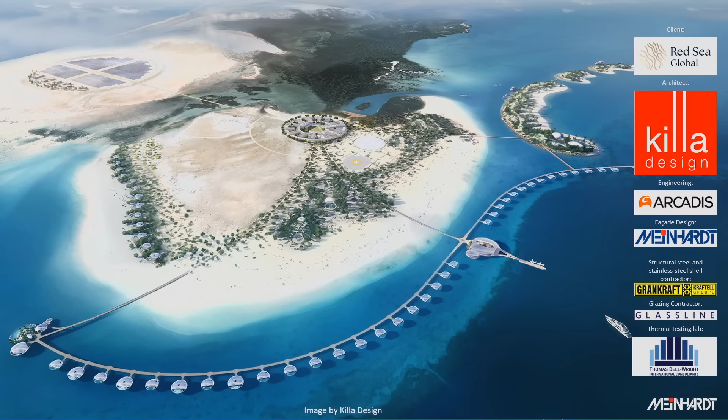So as Arvin said, I am the technical director for Meinhardt Facade Technology in Dubai. And today I'm going to present one project that I've personally been working on for the last 3 years, which is the Shebara Hotel in Saudi Arabia. Shebara Island is an island off the west coast of Saudi Arabia. It's about a 45 minute boat ride from the mainland, and it's a completely off-grid island.

This development incorporates a solar farm that powers the whole electricity for the development. It also has a solar-powered desalination plant that supplies the fresh water. And they also have a small recycling plant to minimize the amount of waste that goes into the mainland. The resort is a hyper-luxurious hotel, 73 keys, and it's spread horizontally across the island in the form of several individual assets.

So there's a bunch of amenity assets, such as the arrival lobby, specialty restaurants, spa, fitness center, kids club, and so on. And the accommodation assets, which take form as overwater villas and beach villas. Today, in this presentation, I'm going to be focusing on the design and the fabrication and construction of a typical overwater one-bedroom villa.

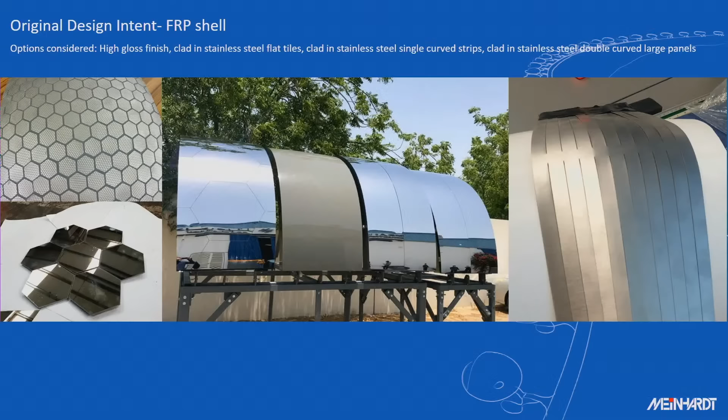So in the initial design stages, the structural approach for the shell of this villa was to have an FRP structure, carbon reinforced polymer structure. So in the very early design stages, we were looking at options of how to finish this carbon fiber structure.

So we looked at different coatings. We looked at automotive painting. We looked at gel coatings. We looked at different ways to clad this FRP. So we've looked at having very small stainless steel tiles, flat tiles. We looked at having long single curved strips. We've looked at having larger tiles, double curved in shape.

And there were mock-ups prepared for all these different options that we were looking at. When the mock-ups were presented, the architect basically rejected them all because they all failed to meet the design intent. What they wanted was a completely seamless structure. They wanted a polished, mirror-finished, seamless structure. So the paint wasn't reflective enough, and the other options had too many joints, basically.

So then we started really looking into having one singular shell made out of stainless steel that was completely seamless. Obviously, we had never done anything like this before, so we started looking for precedent constructions that had this similar approach. So everything that we found at the time was either sculpture-like structures or constructions that were non-habitable.

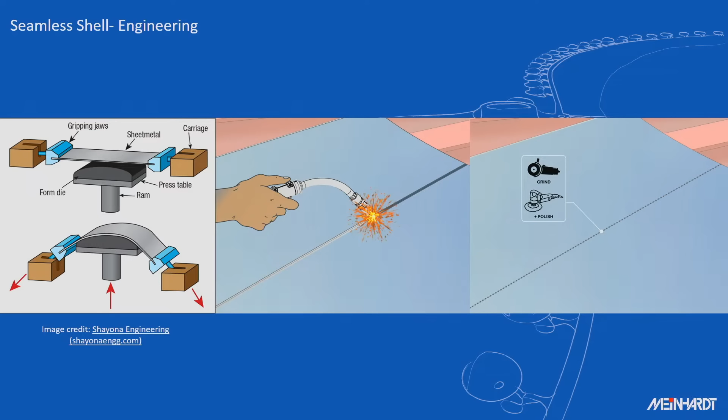So we started our design by trying to come up with the most efficient thickness for this shell. So when we started doing the study, we realized that the thickness of the shell was not going to be a result of the structural requirements alone. We had to also take into consideration the thickness to withstand the fabrication process, because the sheets needed to be double curved, needed to be welded, needed to be ground, needed to be polished. So we needed to make sure that we had enough thickness there to withstand this fabrication process, but make sure that it was thin enough so it was light for the construction.

Another thing that played a big role in determining the thickness of the shell was the visual appearance. So obviously, the visual aspect of this shell had a tremendous importance in achieving the whole design concept by the architect. So what was driving the deflection criteria for the shell was really the visual aspect.

In order to make sure that we had a shell that was thick enough that wouldn't deflect and cause any visual distortions with the images reflected, we ran a number of different analyses, testing different supporting arrangements, layout, and different thickness. And then we would export the deflected shape into a rendering software and render the deflected shape with different backgrounds to understand what the deflection would do in a real scenario.

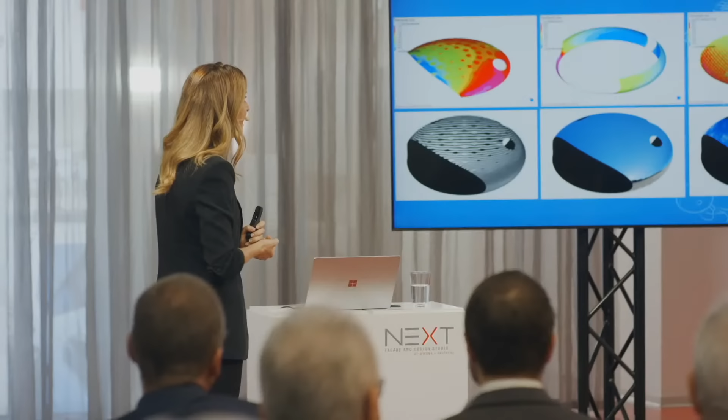And we've gone through a lot of rounds with the architect, and finally he said that this was acceptable in terms of visual distortions. One thing that we were very lucky with as well is that, as you can see, the majority of the deformations happen at the top and at the bottom of the shell, where the geometry is a little bit flatter. And at those areas, the top and the belly, the shell will be reflecting either the sky or the water below. So any deformation is not really visible.

At the perimeter of the shell, where it reflects the adjacent buildings and the surroundings, the structure is very stiff because of the curvature. So the deflections that would cause the deformation are almost unnoticeable on the sides. So that was lucky that we had this shape.

Another thing that we've considered in the design, and that was part of the engineering as well, is that we had to make sure that the connections were flexible enough to allow movement. So again, coming to applying the thermal load, we had to make sure that the connection points will not restrain the shell from moving, which could end up causing deformation when you looked at the shell from the outside.

So all the connection points are fitted with Teflon pads, which allow sliding of the connection and a minor compression, which enables the shell to expand and contract almost independently from the supporting structure. Also, that releases a lot of the stresses.

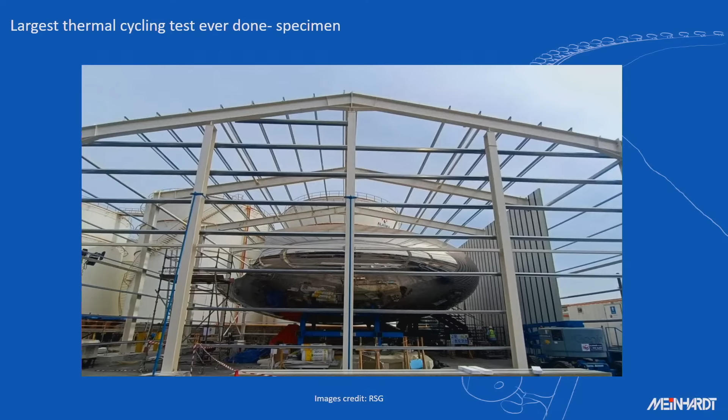So this is the sample. It was at the manufacturing facility. So the lab actually had to go to the manufacturing facility and build their chamber there. This is the steel structure for the chamber. The chamber was then clad with thermal panels.

There was huge air conditioning equipment connected to the inside of the villa, because the inside of the villa we kept at a temperature of 24 degrees during the whole test. And then there was also air conditioning equipment connected to the inside of the chamber to create the cooling cycles. You can see there are some cables there. Those are thermal sensors that were attached to the shell.

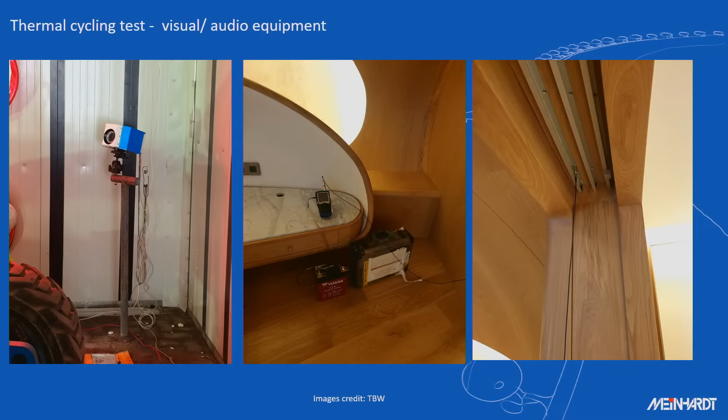There were 500 light bulbs to create the heating cycle. So the cycles were from 5 degrees to 85 degrees. And this is some of the equipment. So the shell was completely fitted out. This was also the mock-up, so it had all the fit-out, glazing, everything. So the inside of the shell was kept at 24 degrees. The external went through the thermocycling.

So we had cameras everywhere that caught images of the whole shell during the entire test, and the audio equipment. And there were also vibration sensors placed at different areas to enable the team to localize the source of sound, if any. Also, the inside of the chamber was painted with vertical lines, so it would be easy to detect any visual distortion on the shell. So the test took over 4 days. And thankfully, there were no recorded noises, and the visual distortions that were recorded were very minimal and acceptable.

Okay, moving on, let's talk a little bit more about the design. So the cleaning and the access for the shell is done by rope access. That opening there is the entrance, and there's a little service room just before you get into the villa that gives access to an access hatch.

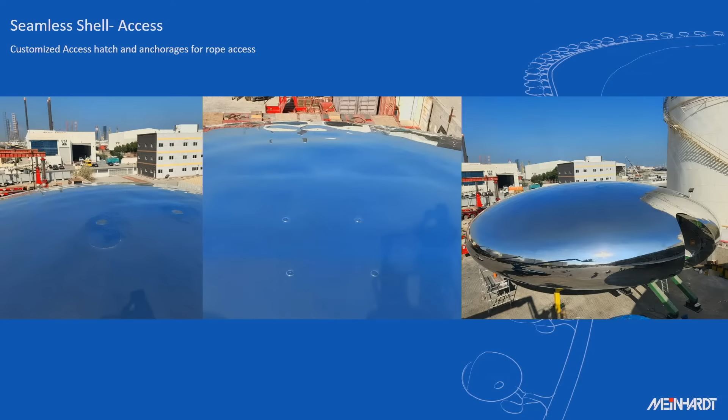There was a lot of concern from the architect during the whole design process that we could not damage this seamless appearance. So everything always had to be very thoughtful in terms of keeping this design intent. So the access hatch was customized to take the double curved shape of the shell. All the anchor points for the rope access also incorporated a little cover plate to make sure that they were not visible from outside.

There's a skylight. The one-bedroom villa has one skylight, and the two-bedroom and three-bedroom have two skylights. There was a lot of study done from our side to make sure we placed the skylight at a location where we could use a single curved glass on the double curved surface. And the glass was actually manufactured flat and then curved in position. So this whole exercise made a lot of difference on the cost, because originally it was a double curved glass.

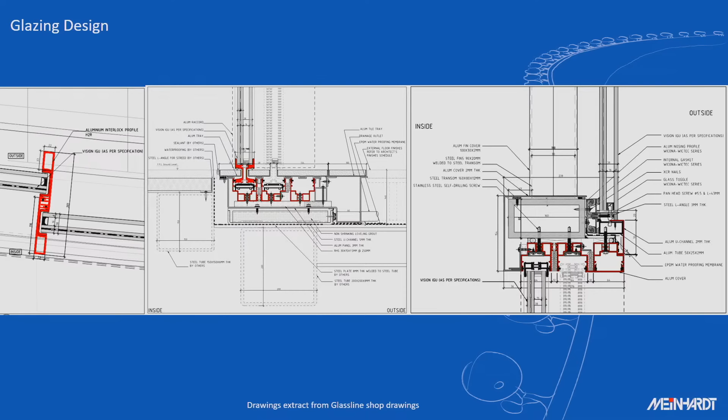The facade system: the terrace has big glazing at the front with a slimline door system, Vitrocsa, and the fixed panels on the sides and on the top are the Wicona system, coincidentally. The reason why I'm talking about this sliding door is that whoever is familiar with the system knows that the flatness of the track is really important for the function of the system. This system relies on bearings on the track. So any deviation or deflection of the track could potentially impact the operation of your door.

Now, the approach for the construction of these shells, or these villas, was completely off-site manufacturing. So all those villas were manufactured in Dubai, and then they were put on a barge and shipped to the site. Which means that when we were doing the design for those elements, we had to take into account a bunch of different deflected shapes for the base structure.

So when the villas were under fabrication, they were supported by a temporary frame, supported at 4 points. When the villa was ready, it was loaded onto a barge, also supported on this temporary frame at 4 points. Once the villa got to site, it was unloaded and placed onto the pile caps, and then the support condition changed from these 4 points to the next structure.

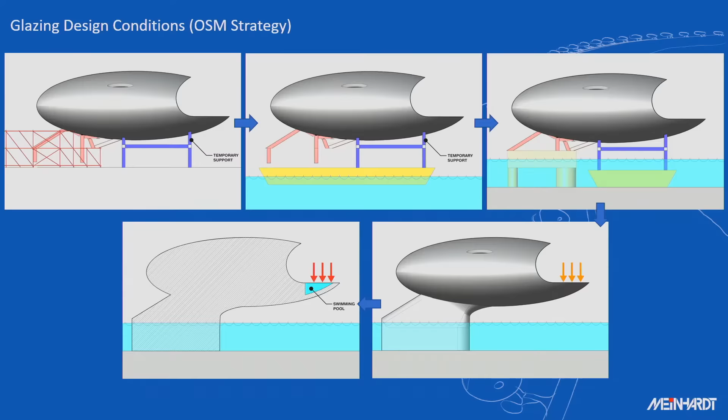So when there was this shift in support condition, obviously the whole thing deflects a little bit here. And then in future, during operation, there's a swimming pool on the terrace that is loaded with water. And again, once this is loaded with water, there's another. So all those movements had to be taken into account, and we had to run the design on all these different deflected conditions to make sure that we had enough allowance in the system to accommodate

all these different movements. In fact, Vitrocsa had to design a project-specific head track for this project to make sure that at the top of the door there was enough movement allowance, because during the loading and unloading, there was quite a bit of deflection at the head beam.

So just talking a little bit now about the construction process. So once this project was awarded to a company called Grand Craft Industries in Dubai, they've done the structural steel and the shell. During the tender period, a bunch of contractors that bid for the project prepared samples to present. So these are some of the samples that were presented during the bidding process.

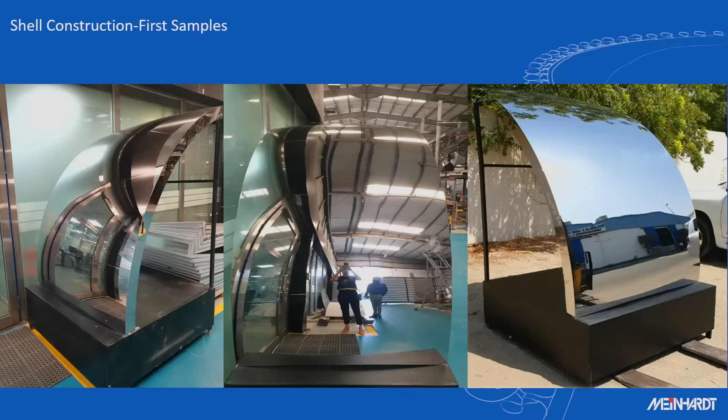So this sample includes 2 welded lines. And everybody got really excited and said, that's great, it looks great. But the question on everyone's minds is like, okay, this is a small sample. Can we replicate that on a full-size villa? So the samples started getting bigger and bigger.

So, at the openings, the stainless steel on the shell wraps around the opening. So we always knew this was a very critical detail because it wraps around and twists, and you had obviously the welded joint along this whole face here. So we started requesting bigger and bigger samples, and then at a certain stage, it was like, okay, I think they got it now. I think we're happy, and everyone is actually quite impressed with the quality that could be achieved.

So on the fabrication of the shell, this is the ellipsoid shape. This shell was divided into 4 typical panels, which essentially means that there were 4 molds that were created to create the double curved panels. Grand Craft would manufacture all the molds out of MDF with a 6-axis CNC machine.

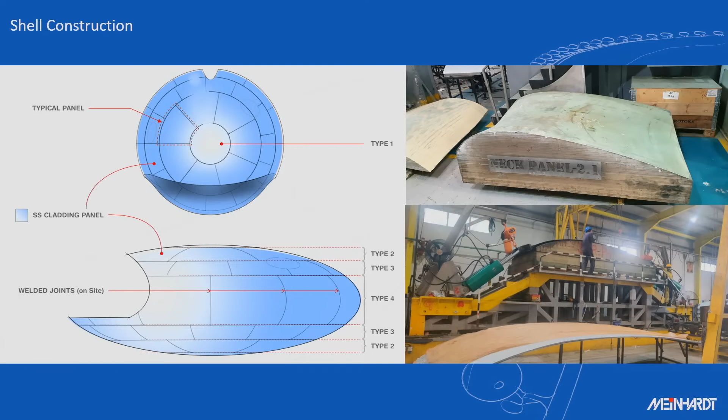And the method used for the double forming is called stretch forming, which basically means you have the panel over the mold and you stretch the panel over the mold until it takes the shape. Obviously, this process takes a few rounds because there's a bit of rebound after you let the panels go. So they had to adjust the molds until they got the right rebound to achieve the shape.

Once the panel was formed into the 3-dimensional shape, they would use a laser cutting machine that has the ability to cut 3-dimensional panels, to cut the panels to size. Then they developed a bunch of panel-specific polishing machines that would do the first polishing to achieve the first set of mirror polish finish for the sheet as a whole.

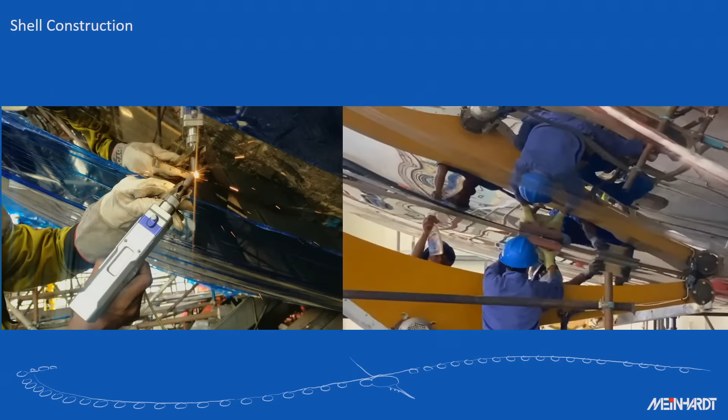Once the sheets were fabricated, they would be shipped to the assembly facility in Al Hamriyah in Sharjah, near Dubai. And then the panels would be assembled into the frame, and they would start welding the panels together. So, that's just some images of the welding, but the real work came with the polishing. After the welding was done, they manually ground all the panels and polished and polished and polished.

And this is an image of the first benchmark villa that was produced. So there were obviously a few rounds of benchmarks that they would present, and we would all come and see, no, it's not good enough, it's not good enough. Eventually what they did is they removed the villa from the fabrication facility to let it be under open sky. They built a pond under it, and then everyone was really happy.

Because the problem is, obviously, it's really good quality, but you can still see a little bit of the welding mark. And obviously, when it's reflecting the roofing full of straight lines, the same thing happens that happened with the zebra board. All the deformations become really apparent. So the minute they moved the sample outside and they put the water, all the deformations were gone. So everyone was very happy with the results.

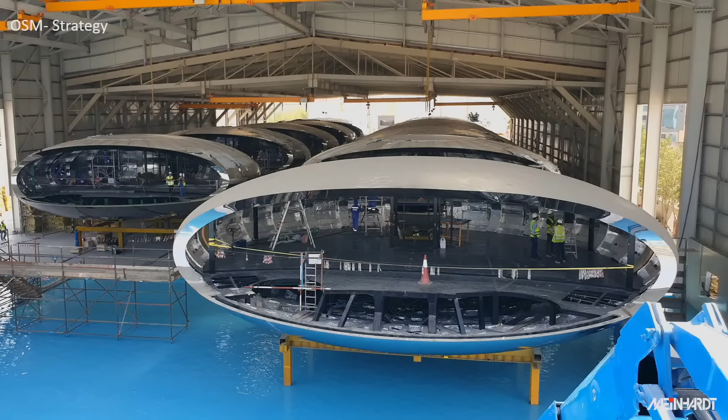And this is just a picture of the fabrication line, so you guys have an idea. There were 3 of those ongoing simultaneously.

Okay, so then like I said before, the approach for this construction was to have as much as possible fabricated off-site. So everything was done in Sharjah and put on a ship container. So we had structural steel, the stainless steel shell, glazing works, MEP ducts, swimming pool, and a little bit of the internal works prefixed onto this villa before it was shipped to site. The total weight of the construction was about 115 tons.

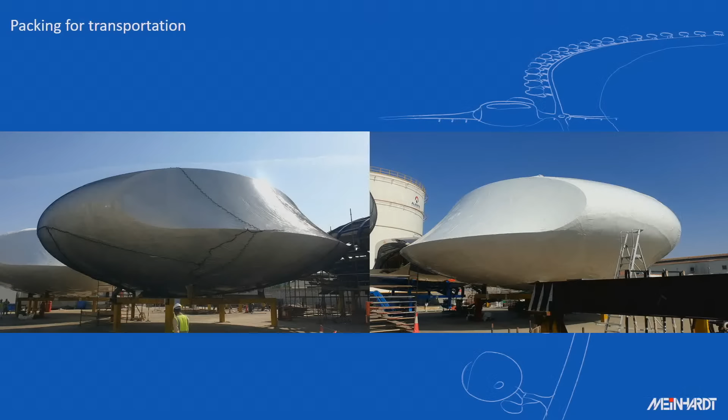Once it was finished, they would wrap it around, seal it, and then put it on the back of a barge. Now, this is the construction facility where it's located, in Sharjah. They built 3 warehouses here side by side, and it's conveniently by this canal that has access to the ocean, so the loading onto the barge is very easy. I got this photo from Google Earth during the construction, and you can see here the shells shining at the end of the production line.

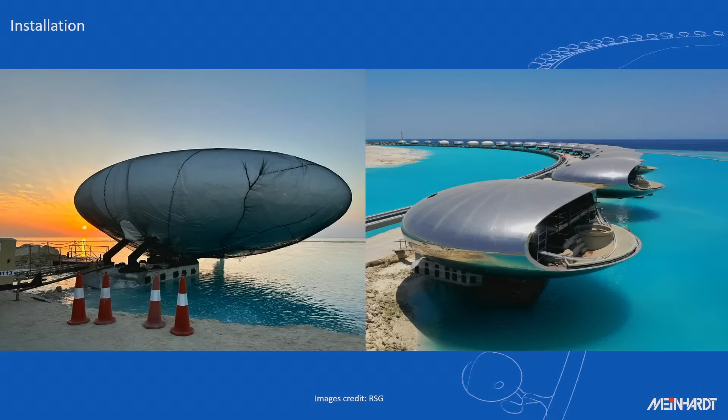So once the villas were ready, they would load 4 at a time onto a barge. The trip to KSA took about 22 days. Once they got near the site, they would load the villa onto a smaller barge that could navigate the shallow waters. Here you still have this temporary support. And then finally it was unloaded onto the pile caps on site. That's a photo of the first villa installed, and this is a more recent photo of an almost complete set of overwater villas.

This is just some more recent photos from the site, as it looks. That's probably a month old now. So it's almost finished. I think the plan is to open the hotel next year.

So just before I finish, summarizing my personal experience working on this hotel. It's not easy to work on a project like this because it's something that has never been done before. It's very innovative. Everyone is criticizing, literally everyone. Everyone that would come and see the project would find 100 things that could go wrong. So one of the things that was really good is that the design team were very close. We were very close with the architects, with the engineering team, very close with the client, which is really, really important, and also with the contractor.

Because when you work on something like this, there will be many challenges along the way, and you need to have a good connection with the design team to support each other. And if someone comes with an idea that is outside the box, that's probably the one idea that will work. So just be open to ideas and try not to criticize, because the amount of critics from outside was huge. Once the project went out for tender and we shared the documents, everyone said this is never going to work. So it's important to have a really good relationship, so you can get support from each other in these hard times, and support each other's ideas to make it happen. So that's it. Thank you.

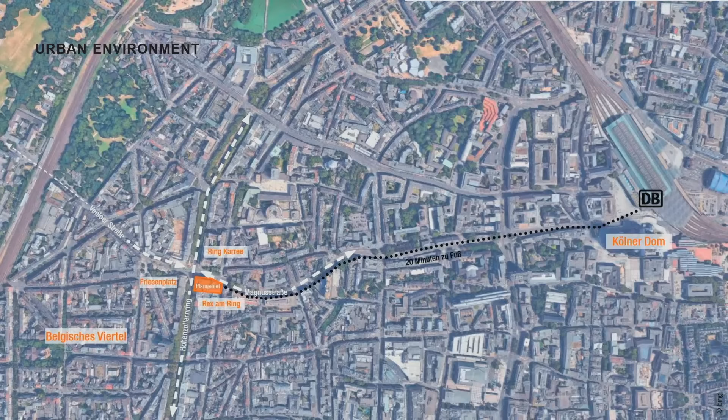As you see, renovating existing buildings has one of the biggest impacts on decarbonization. So I would like to show you our Central Cross project. I'm going a little bit deeper into this refurbishment project, and have also focused our flashlights briefly on 5 more projects from different stages. This is our Cologne project, located on a very high-frequented crossroad with a direct connection to the main station and to the Cologne Cathedral. And of course, everything, especially around the cathedral, is related to this World Heritage and should be considered carefully.

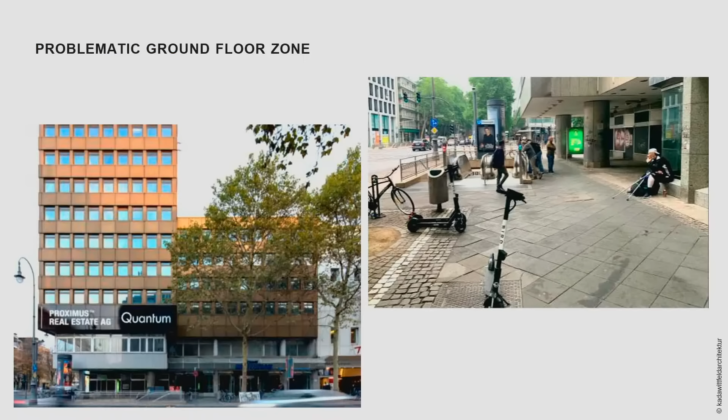We could convince our client not to demolish the building. He could build a higher high-rise building on that site, but we said, okay, we want to work with the substance and structure which is there. With the client Proximus and Quantum Real Estate developer, you see the usual problematic situation of these very unattractive ground floor areas. We have the metro station around, and so we decided to give the building a new appearance in pinstripes, to make it more elegant, to create more generous space at the ground floor, to create new addresses for the building, to activate the roof surfaces, and also to optimize the functional offers.

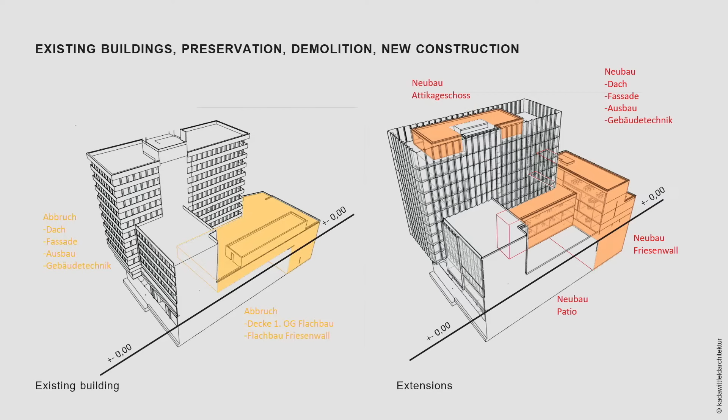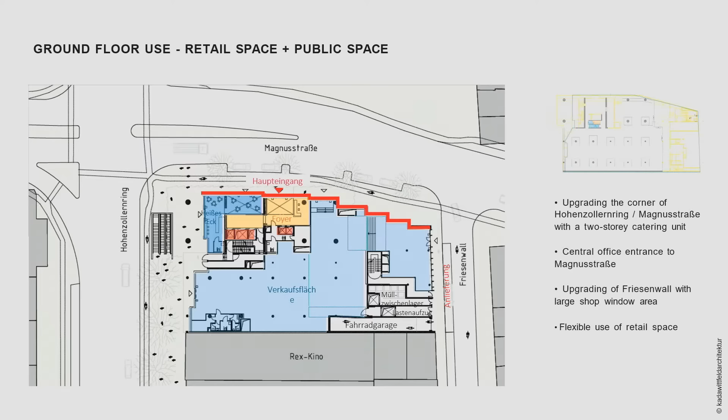And the new address, we were trying to emphasize the corner situation, giving it more generosity and space, and a two-story foyer. And with this staggering also along the road, we are creating more urban space with a more open and transparent appearance.

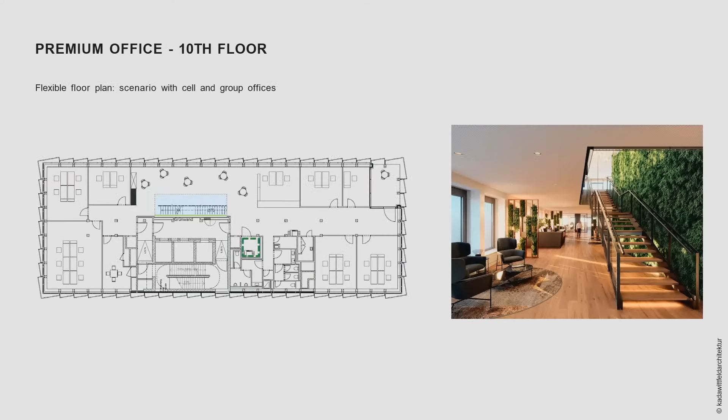So the existing building, we have very low story height. We try to compensate for that in the extension building. And here you have an idea of these staircases connecting the two. And we try to give each story an outside. Here is a small loggia, trying to create new internal connections, direct connections. And of course, the potential of the rooftop with the fantastic overview over Cologne, and especially on the Cathedral of Cologne.

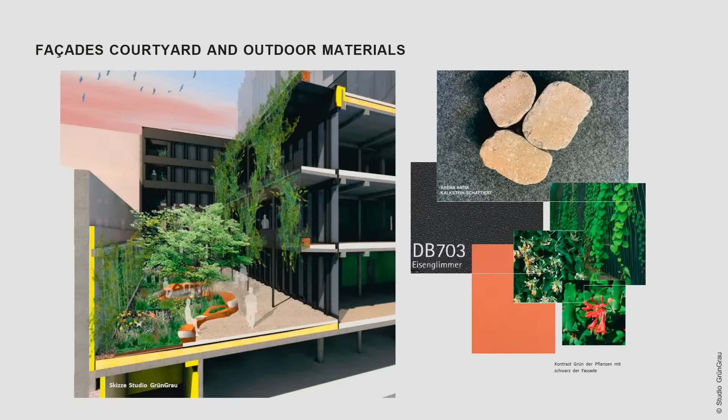This is a graphic that shows that each story should have an outside quality in terms of different offers, like all the terraces; all the offsets are creating new terraces where people can connect and come together and work. The courtyard, which is very green also. And the ecological added values are diverse. Of course, we are trying to bring out as much as possible. We have a certification aim.

And what always plays an important role to us is to really look at the local passive potential of the sites. So we will use the wastewater heat, and we will also try to optionally use the heat and the cold of the metro station. And photovoltaic, everything, rainwater retention, what a modern building should offer.

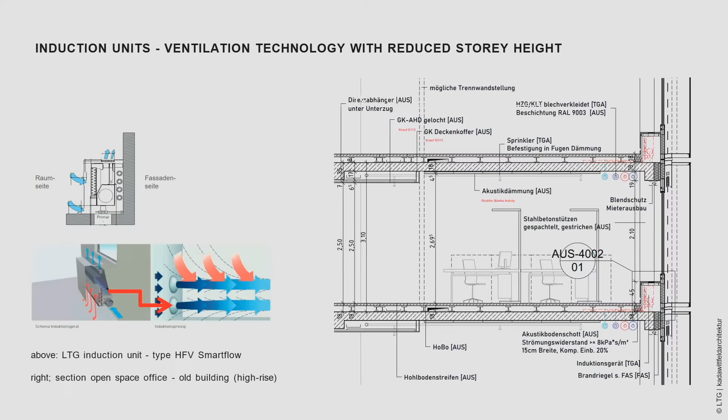So the technical concept is, by creating less altitude for the infrastructure, we're working with induction units, devices for cold and heat supplies, and also for the ventilation, decentral ventilation, so we can put the infrastructure in the cavity floor and also in the place above the moving area, so the working area will be free, just adding this acoustic absorber layer above, and the other infrastructure is running alongside the facade. One more detail for that.

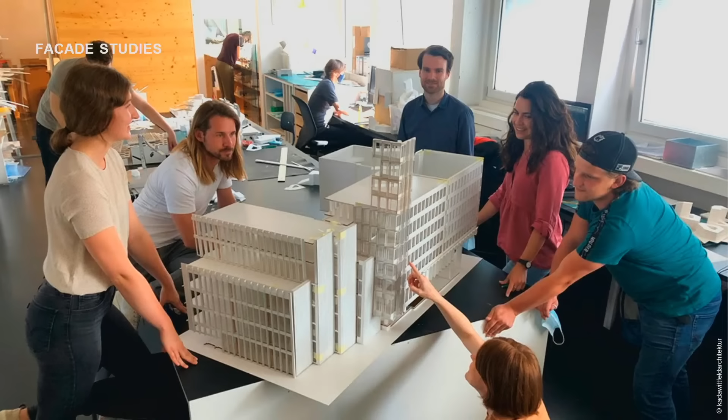And the basement story used to be a parking lot, and now we are able to implement 150 bicycles, offering all the devices and services that a modern bicycle garage should have. And we still love to work with physical models. For a lot of every project we are building these physical models and are considering it together with the team.

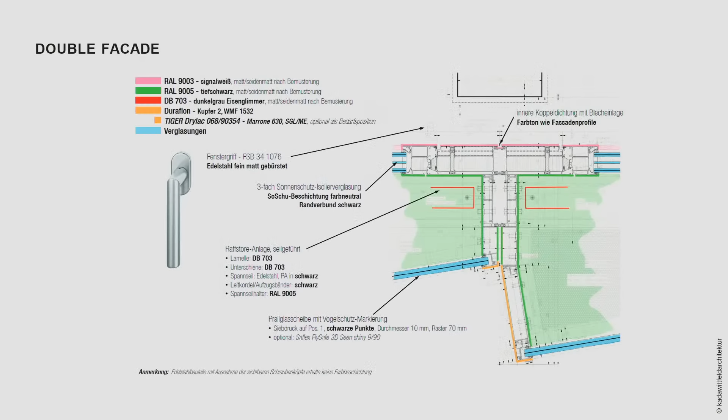And here are some impressions for the facade. It's the double facade. The windows can be opened and then offer this comfort ventilation individually. And we are supported by Drees and Sommer, the facade experts in Cologne. And of course, I want to show you also these beautiful details.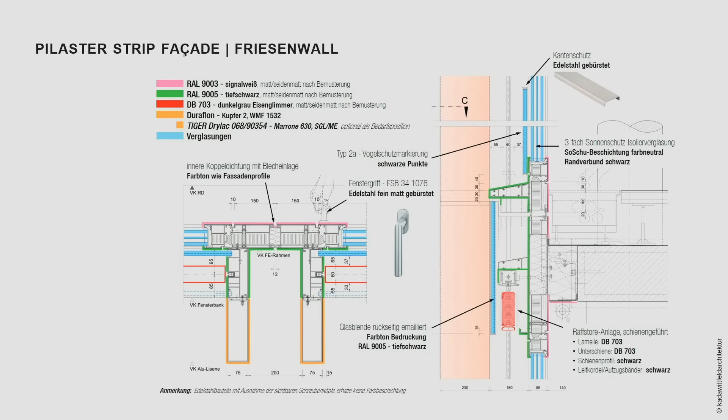So here you can see that this staggering is a design idea for us to deal with on different levels. So we have these volumes of the extensions staggering along the street, but also in the ground floor area, but also in a smaller scale at the opaque facade, at the extension, and also at the double facade. So the simpler facade in the extension, with this double pilaster, is trying to emphasize the verticality of the project. One more detail.

And now I will come to our focus, our short flashlights. The first project is a very old one. The competition was in 1999. It's the central station of Salzburg, and we won the competition in 1999, and it took us 10 years for planning. So it was quite complex to convince also the monument preservation offices of our design, and it took then 5 years for the realization.

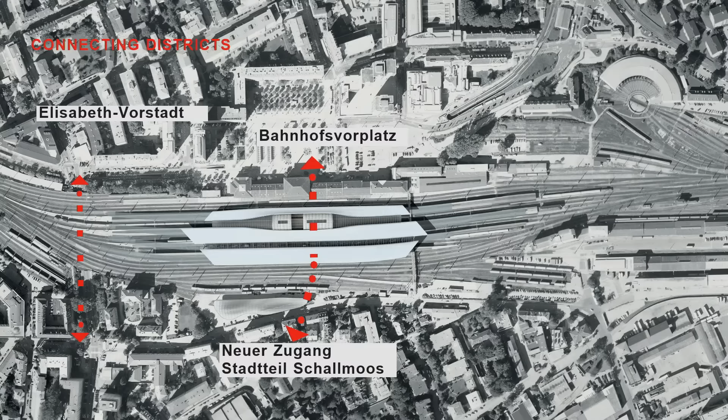So you see 3 eras, 3 roofs, and one main challenge was that we should switch from a terminus station to a through station while the operation of the station was going on. That was quite challenging. And the second main task was to connect these 2 different districts together. So we have this passage level on the ground floor level coming from the main station side, and we have these new linear dynamic tracks above.

And here, a first impression of this historical entrance hall and the platform, the old historic platform hall from 1909, which we implemented, and it was important to us to have one big design for this new roof on the top of the main station. So it was a kind of substantial refurbishment for the historic part.

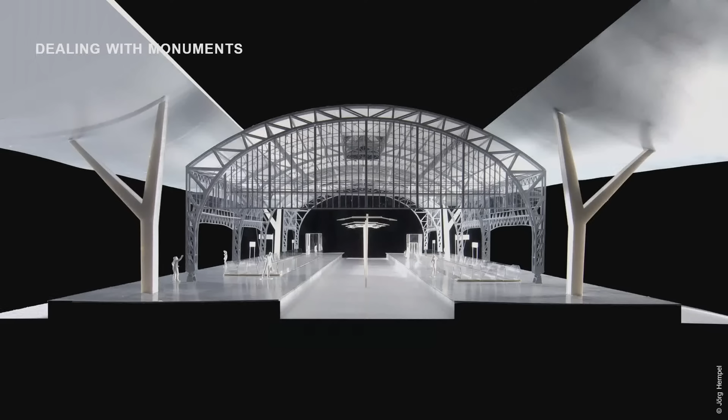And here a model of the platform hall, the old one, and we built a lot of models and tried to look how we can combine them together so that the new roofing is not stealing the show from the old structure. And this is what it is today, and it looks quite natural right now, but it was really a huge effort to restore it.

And it took us a lot of convincing the monument preservation offices that we can change the color of the construction. But it was very important to us to have as much natural light as possible and a bright railway station, so that people feel welcomed. And we were really pleased that the Austrians chose this railway station after realization as one of the most beautiful stations in Austria. So that was nice feedback and motivation for us.

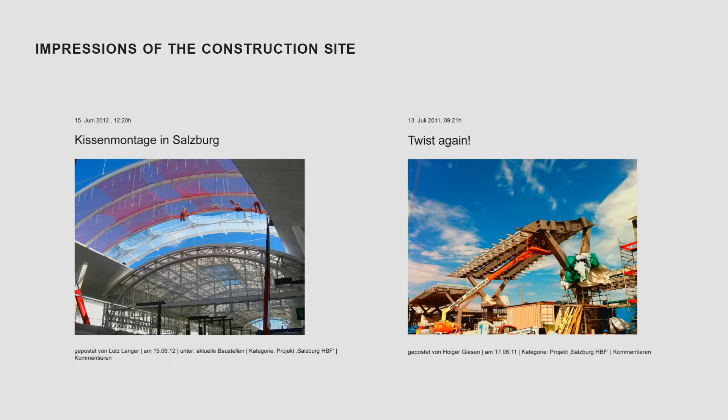And we could only take a membrane construction for the roof covering. Any other structure would be too heavy for the very filigree steel construction, and with the pneumatic system we could react flexibly to the snow weight, which is quite important in Austria. But we also liked a lot the transparency of this construction, which was also very important for us. And here you have an idea of what I'm talking about.

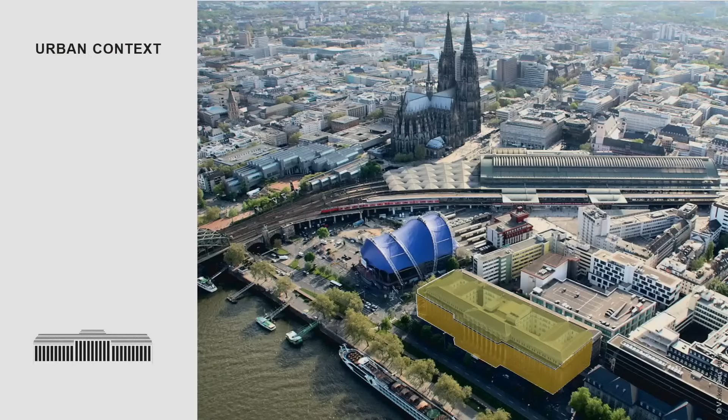The second project is a refurbishment of a former office building in Cologne, quite close to the main station and the Cathedral of Cologne. It was a railway company building, located very close to the river Rhine. And we decided to shape the old silhouette, the old contour of the mansard roof that was destroyed in the Second World War. We were also implementing old historic elements into the foyer, the flooring, and with these horizontal aluminium stripes we can describe the old contour easily.

The thermal facade is offset so that we can offer new balconies and a fantastic view to the river. We did the signalétique for the tenants, a European Union aviation agency, and it was finished, I think, in 2016. So this was our approach to give these stories their own identity. And that's what it is nowadays.

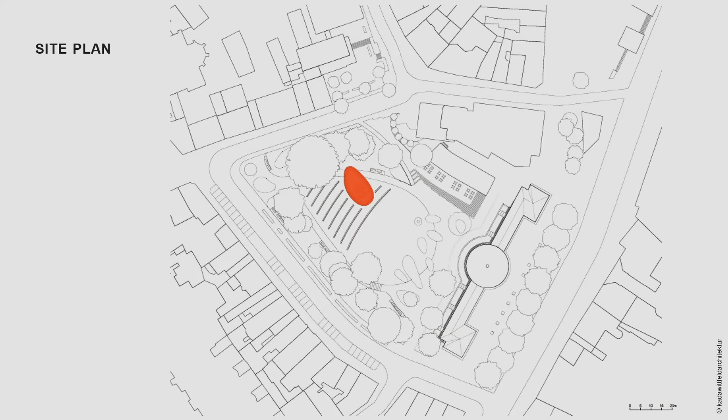Now a small scale change. It's an archaeological pavilion in Aachen, finished in 2013. And also a very representative location in a very important small inner city park in Aachen, and we chose this elliptical form according to the landscape design, and we implemented a pathway also through the pavilion.

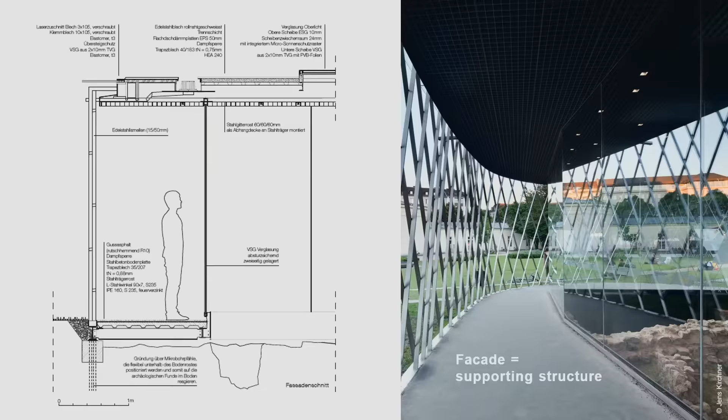And we were inspired by this layering pattern of 5,000 years of historical, archaeological layers, and this inspired us for this construction, which is also the facade of the small pavilion, and you have this window into the past, which is quite nice to discover. And the challenge was not to touch the archaeological finds in the earth with the foundation. So we built a simple steel frame with flexible micropiles.

And it was very nice. It was supported by a local company, and it was nice to see that they are identifying themselves with the project. And here you see that it's really a light and very open construction, and people are still relaxing at that spot.

So the fourth project is a bank house also in Aachen. It's vis-à-vis the old theater in Aachen, also close to this inner city park.

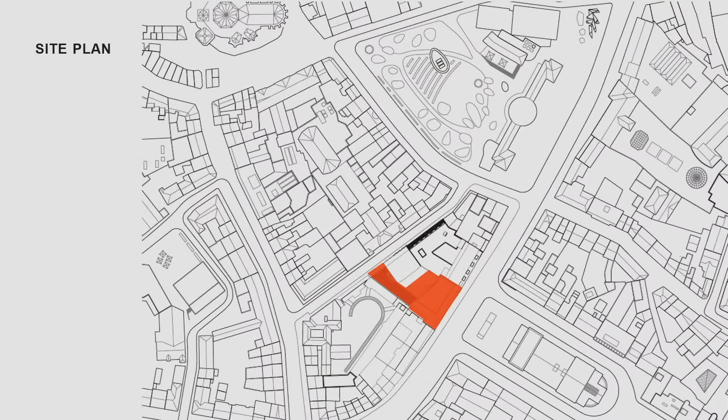And yeah, it is always fascinating for us to work with unique historic elements and to combine them with new, so kind of innovation and tradition, bring them together. And so we think that our approach is more like an equal relationship between both the old and the new one, so to strengthen the identity of the place.

And it was also important to have transparency and an overview to the old theater, which is very nice and an indoor quality. So we took also the 4-meter height from the historical building. So we could convince the client not to bring one more story into the project, but to watch out for these structural impacts that are already there. And of course, the roof contour, we took the old one, but realized it in a way that we also gain as much usage space as possible.

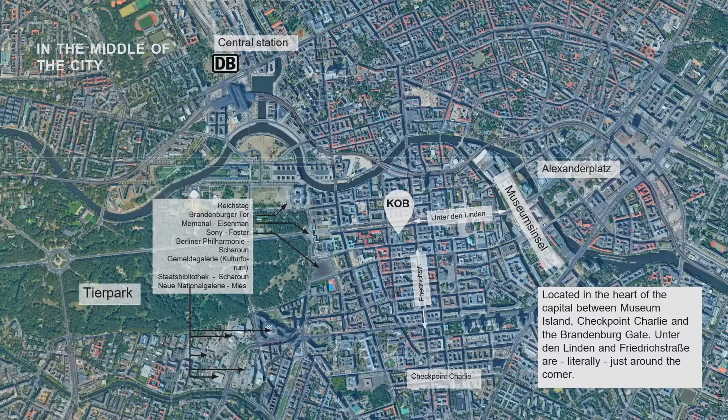And the last project is our actual planning for the Komische Oper in Berlin. It's a cultural institution. It's one of the 3 music theaters in Berlin, and here the opera hall itself has a neo-rococo atmosphere, originally still there, but it has to be renovated carefully. And you see, it's located also on a very prominent site. It's quite close to the Brandenburger Tor, and it has a very rich history. It used to be integrated into a block structure, and after the Second World War, when the surrounding was demolished, it came out to be more a solitary building.

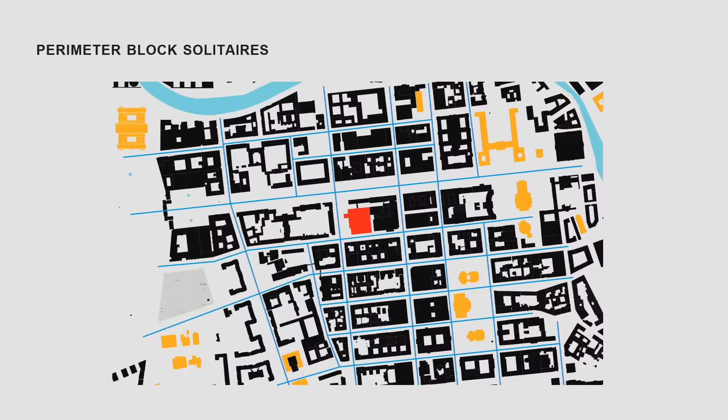And the new functional services that were claimed, we put them into these different volumes that are reacting with the urban surrounding in altitude and also in the diversity of uses, and that are creating new addresses. And this is kind of the place of metamorphosis. So the existing building is really a very good example for metamorphosis. And right now we are showing these different uses with our different volumes.

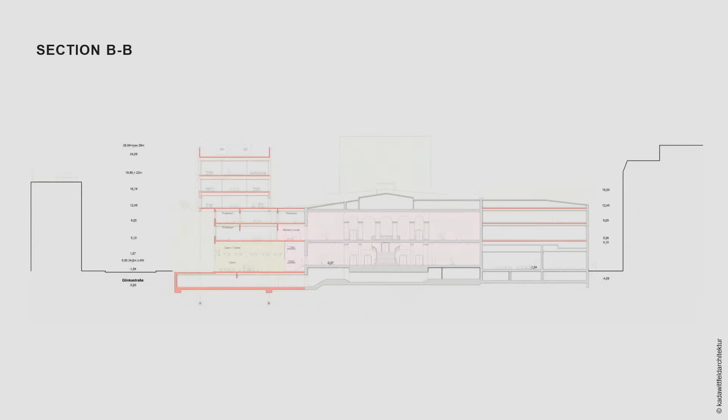And it's a very compact, very dense program, also very complex in its different requirements. The stage tower should have 5 more meters for the technical issues, and the rehearsal rooms should be free of columns, and that was also quite challenging in terms of structural engineering. But we are approaching, and thanks to a precise 3D model, we are hopefully reaching our goals with it.

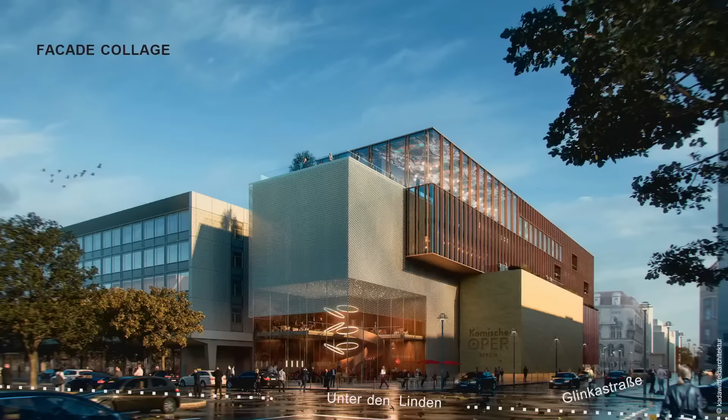And you see this facade collage representing these different uses and the different volumes once more. The patterns and materials for the facades refer to what is already in the old building. So we have this limestone, we interpreted it into this concrete wall. We have ceramic and metal mesh, and here especially the corners with a very open and transparent situation for the ticket shop, and there's a cafeteria on the other side.

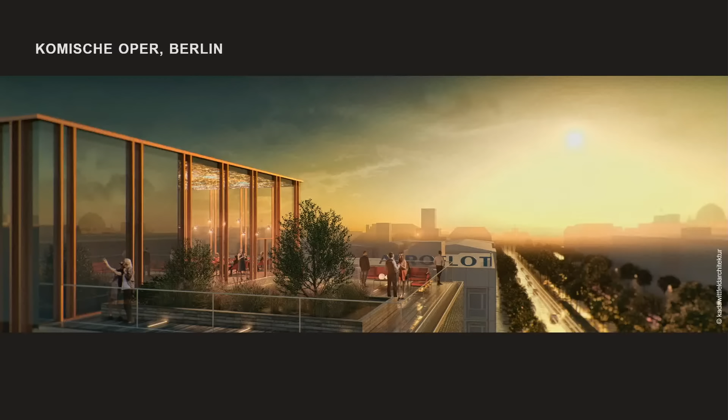There will be a gastronomy, so we will be offering the public a lot of new addresses, and yeah, 3 centuries in one building. And we think that having a drink on the new rooftop bar is also a kind of added value for all Berlin inhabitants and visitors.

So as a conclusion, I would like to speak about these 5 claims that we have. It's always important for us to read the history, to have a profound analysis, to look carefully and transform carefully. It's to recognize the unique thing and to feel inspired by the historical structural things that we find. Hopefully it should be a kind of unity, but also preserve diversity. And it's always a kind of collegial coexistence of the old and the new one.

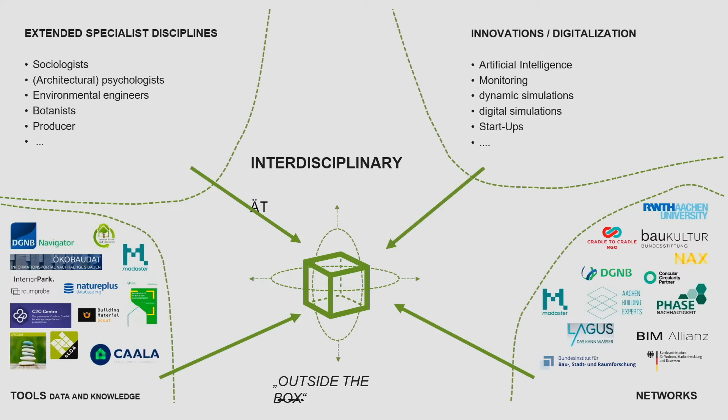And it's also really the time for optimization, so we can take a deep look into the project and watch out what is going well and what is not running so well. So it's a very important thing for optimization. And as we have a very green heart in our office, we absolutely believe in as much green as possible. I wanted to show you some of our green projects we are working on or have already finished.

And last but not least, we think that it's very important nowadays to think outside of the box. We cannot think in silos anymore. We have to talk to other disciplines, to sociologists, scientists, engineers, to learn more about our ecosystem, because climate protection really has no borders. So we are trying to watch out for the innovation potentials of digitalization and which tools are coming up. So we have to rethink the quality of our simulations and of our software.

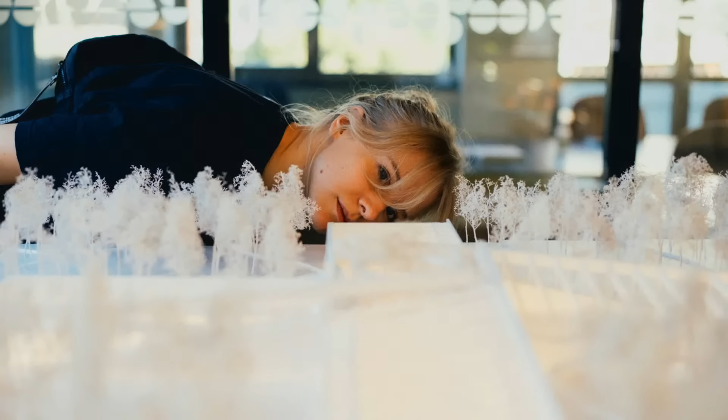This was the team in the very beginning. So you see some of our engineers, some of our architects, some of the partners, and me as well, freshly graduated from school, and the model in the middle. This is how it all started, you know, you just have a model and you never know if it's going to be built, but fortunately enough, it was built. It's called the Plus because it's quite obvious in plan view it is a plus.

This was when it was started to be constructed. That was in the wintertime. In Norway, they also build in the wintertime, because otherwise they wouldn't build half a year. All the concrete was poured actually in the wintertime, and then we started constructing, and after 17 months we had the finished factory. That was last year in March when it was finished.

This is how it looked last year in March, and the factory is actually right between the steel factory of Vestre, that's the company that's producing the furniture, in Sweden, and their headquarters in Oslo. So right in this middle part on the Swedish border is the new factory, pretty much in the middle of nowhere. You wouldn't find it if I didn't point it out.

They have produced sustainable outdoor furniture for decades because this company was actually established in the 50s. So it's running in the third generation as a small family company. And this is one of their furniture pieces. And they came to us and wanted a factory that is as sustainable as their furniture, which is very interesting because we had to reach BREEAM Outstanding, and there hasn't been any factory in all of Europe that has ever had a sustainability standard that high. So we had no prototype whatsoever.

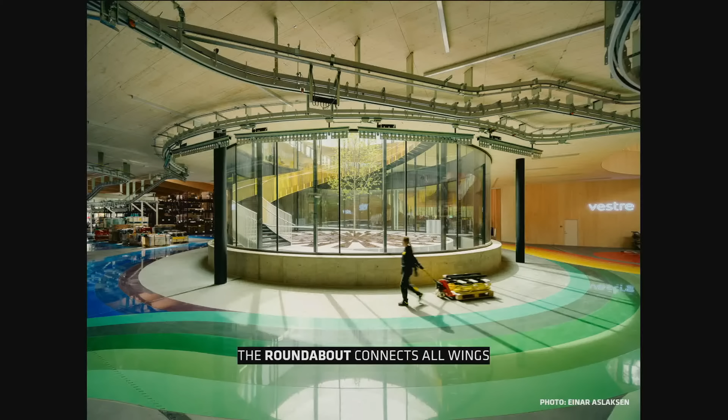We have this, what the client called the German Autobahn in the middle. So all the forklifts and all the conveyor belts, they're going into this middle lane and they have to be kind of translated throughout the factory. This is how it looks. So you see the conveyor belt at the top. I come a little bit later to this whole color part, why it's all colorful. But you can see that those colors from the different factory wings, they meet inside of this roundabout. And you see that there's an inner courtyard where you can also, as a visitor, go down and look inside of the factory.

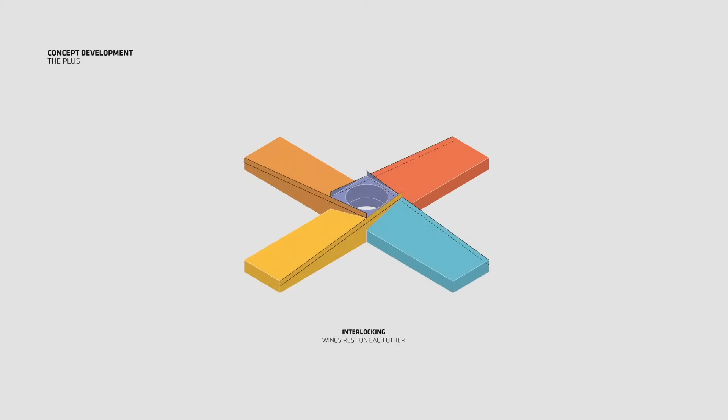Then we have, as the 5th program part, an office and an exhibition, but that cannot disrupt the factory flow, so it's lifted above. And this is also how the factory got its shape. So you basically have this office floor on top, and at the same time, you want to still look into each factory wing, but also still out in the forest, because we are in a 300,000 square meter forest, which is nice. So on top, you can kind of see how it looks. You either look into the factory or out in the forest, and that's why basically the roof from each wing is just picked up one corner and adjusted to fit the office on top.

This is the roof terrace, so on 2 sides you can walk on top of the building and relax on the roof terrace or go down into this courtyard. It's 24/7 accessible, and that resembles the Scandinavian concept of Allemansrätten, which means Jedermannsrecht, the right to roam for everyone. So you can get your tent and come to the factory and sleep there if you want. So that's just how Scandinavians roll. Maybe also because they are so few people, in the same size as Germany they have 5 million people, so everybody can do that. But that's how they wanted it.

This is basically the wood construction. First, we wanted a portal frame construction, but there was too much wood, so we decided to use the MEP corridor for most of the cross bracing. And you can see that it's kind of like this reciprocal structure. I'm always explaining it like this: each wing is resting on the other one. If you take one wing away, the thing would collapse. So that's how I usually explain reciprocal to people that are not used to it.

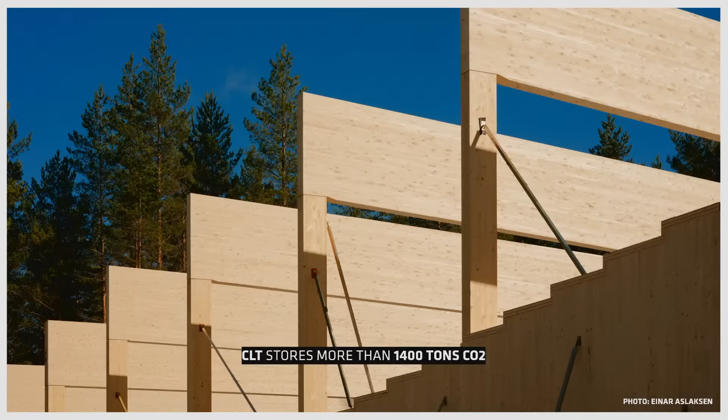The CLT that we use is storing more than 1,400 tons of CO2, which is a nice number, but timber is not sustainable to use if you don't know where it's coming from, and that there's sustainable forestry behind it, and that you plant trees again when you take some of them out. So we made sure of that. We have this courtyard in the middle that is green and is at the same time the exhibition space for Vestre, because they make outdoor furniture, so it's nice to have the furniture in this outdoor plaza.

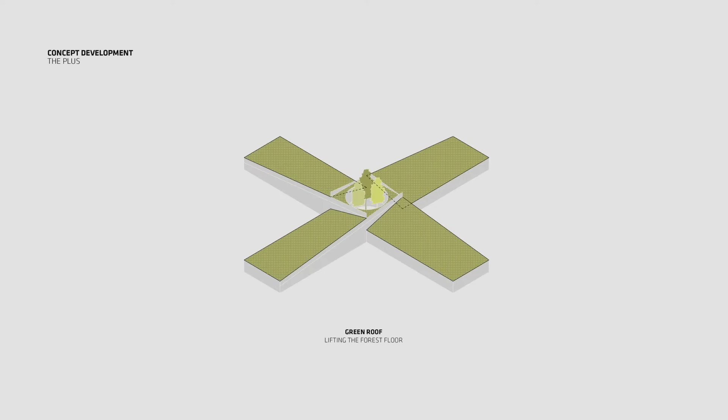The green roof we added because we sealed a lot of forest floor, because usually a factory is kind of a one-floor thing. You use up a lot of space, so you try to give it back. And as you can see, you can walk up to the roof, and in the coming years there will also be a trail that makes it possible, if you have a stroller or you're in a wheelchair, to also get up to the roof.

These are the tough ladies that took all the plants from the neighboring fields and put them on the roof. So that's basically our 5th facade, if you may say so, because we are looking onto those roofs from the roof terrace as well. So it was very nice that they made a real effort to take plants that were coming from the site. At the same time, those plants are helping with solar gain from the solar panels, because all the green on the roof is cooling the solar panels in summer, so we have more solar gain.

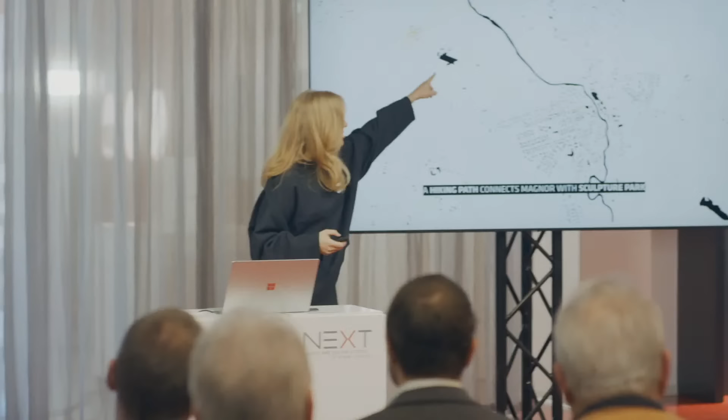Yeah, this is this tiny place called Magnor, where the factory is actually standing. The factory next to us is actually Norsk Hydro. So we have a neighbor, and they were happy to have us because this whole area of the 300,000 square meter forest would have been an industrial site, all concrete and one factory after another. And then Vestre came and said, like, I'm going to save this forest, and there will only be me and Norsk Hydro here, and we're going to revive that forest and make a park

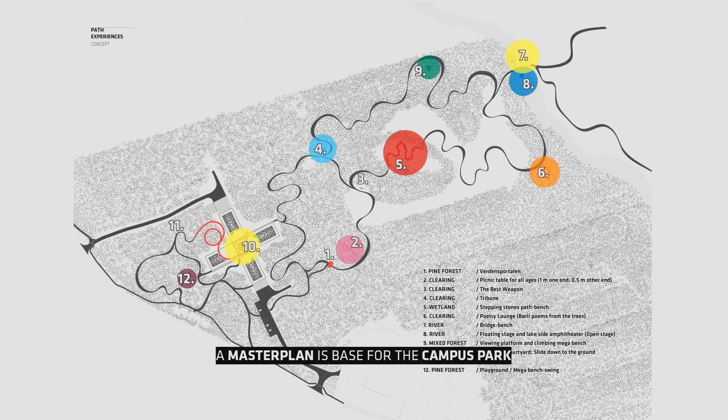and make also the circle back into Magnor. And Magnor has, I think, 463 residents. So you know how tiny it is. So they were very happy that there is a workplace and the village is getting up to speed. This park will develop like different unique furniture pieces of Vestre. So they have different furniture pieces that are maybe elongated or scaled up. And exactly like this looks on the plan.

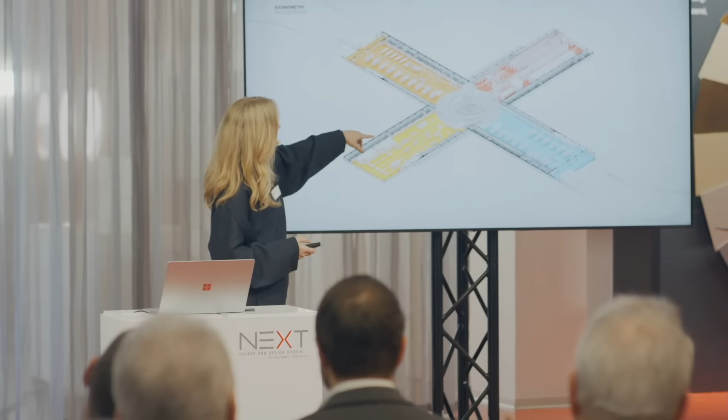And then in the course of time, we make some kind of visualization like this to just understand the logistics of the factory. So basically what you see is the logistic that works best for the factory and the factory flow, and that's why it has this plus shape. So you see in blue, you come in with the trucks, and they bring the steel and they bring the wood. It's going into the wood factory in one way, and it's going to be CNC milled and cut to pieces, and then it's going into the assembly, and the same goes for the other side for the steel, and the steel is being powder coated. And then on the other side, the trucks go out and bring the finished furniture pieces into the world.

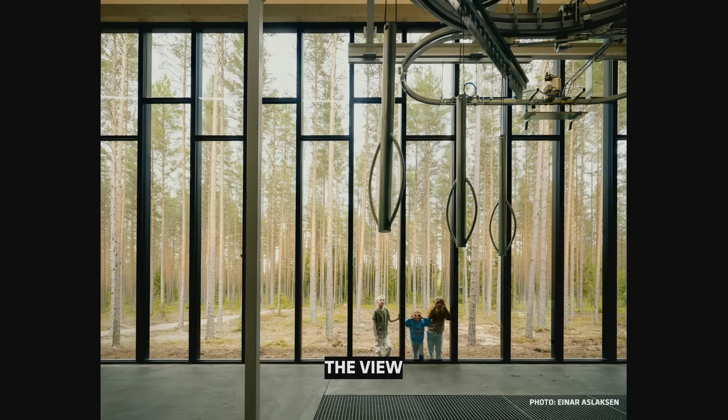And this view was very important for the client, because he wanted everybody to come and see how production is working, and that it's fun, and that you can be inspired by it. And that was actually the first picture that they gave to us, how they imagined that their factory would look like. Of course, there's no structures, there's just windows, which would be nice for any architect, but we couldn't really do that. But this effect that you're right next to the forest was always present, so we tried to keep that.

We have the facade. The facade is a burnt wood facade. Now you can ask, why did we choose that? First of all, because we're in a forest and we wanted to keep this kind of wooden topic. We wanted to keep timber as our main facade, but then you can oil the timber, you can wax it, or you need to paint it on and on again, and we have a lot of closed facades.

So for us, it was very much a maintenance decision, and this very old technique that the Norwegians and the Japanese people used for centuries is actually to char the wood, and it lasts for 60 years without any maintenance. So we use that, and that also tells us a little bit that it's not always new technology. We also go back and see what has already been there for hundreds of years. What can we use again and rediscover?

Yeah, we have an LCA-driven facade. That means that we had a lot of trouble getting the right amount of window area to get enough daylight in for basically the working rules, but at the same time be a passive house and have the energy standards of having not too much of glass facade. So the glass facade that you see here is exactly the amount that we could afford for both to kind of meet in this golden area.

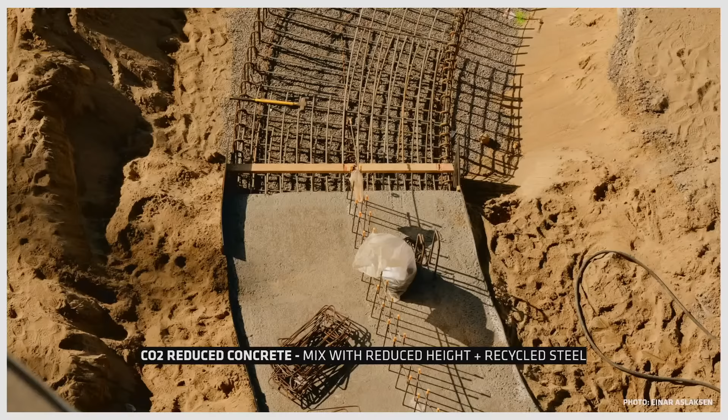Yeah, the cut trees on site, the minimum amount that we took, is used in the subconstruction. It was not mature enough to be used for anything else. So you cannot see it visibly, but most of it was used. We have a CO2 reduced concrete mix. That means also, if you take a section through the whole building, you see different heights of concrete because the machinery is sometimes more heavy and sometimes you don't need the load bearing. So it's a mix of both.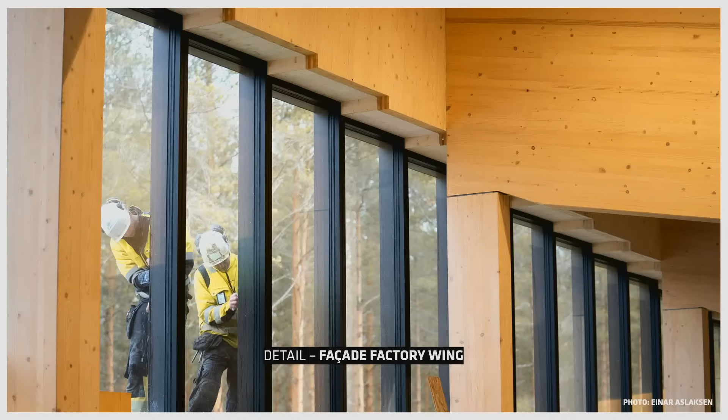Here, like a picture when they mounted the facade. And in this book, you can also see all the details because we're usually getting told that we cannot develop details. And now you can actually look them up and see that they are maybe not always good, but these ones are very good.

This is usually how we render the facade before. This facade system is like 1 meter wide, just because we wanted to have steps that are following the facade up to the roof and also inside. So in that book, you can basically see that. Maybe Christian will just take it out and show it to people. There we have all the facade systems in and how we usually kind of develop them. Also for the courtyard, which is curved glass, which we cannot always afford, but we really love as architects.

Exactly, and then also the gates, because the gates are huge glass facades that can basically roll to the side and open for the trucks, which was also very wanted by the client. It's not always the architect only. Exactly, and then timber is of course also good for people to work in or to be close to. It has a lot of health benefits, which is also part of BREEAM.

People underestimate that people actually have a view while they work. My father was working 20 years in a factory that had no windows, only windows to the top. And you could see the effects after 20 years that it had on him. So we should think more about our working conditions, maybe in those settings. This is the kind of daylight factor analysis that we use to choose the window facade, the facade in terms of BREEAM.

Basically, this whole system to go through and how much facade can we actually bring to the table. Then we have some skylights in the roof, just because there are certain areas where people are standing more than 30 minutes, and then you have to have a certain amount of daylight over the day. That's BREEAM, so we had to calculate that as well.

Biodiversity: this is a productive forest. All the wood that you usually use for construction around here is coming from there. So everybody that's thinking, oh my God, we're taking away trees, they would have been taken away anyways. That's not a real forest. Everybody that has been in a real forest can see that's not a real forest. So we have to make it a real forest again.

We have BREEAM Outstanding, finally. We had the last tick now. We're Paris-proof, and we have also FutureBuilt ZERO.

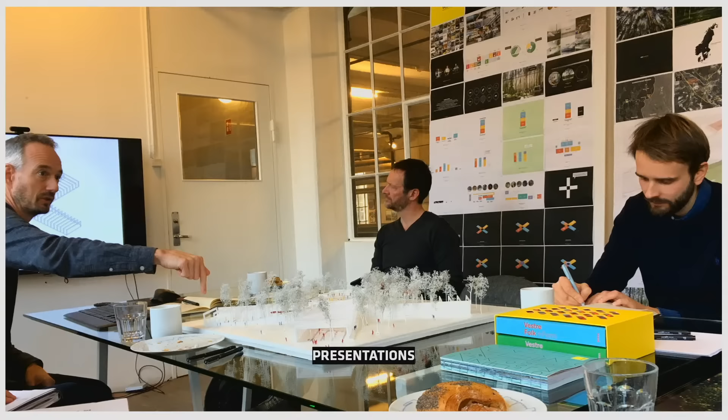A few behind the scenes. This is the team over Corona and after Corona. This is our engineer that's not happy with what we did. We do a lot of virtual reality and renderings and stuff, you know that. We also built huge models. The centerpiece of the factory was actually the most complicated because everything had to come together, so we had to model that quite big.

Here's the ramps that lead up to the roof, and this is our construction architect that is not believing that 50 centimeters less is really good. So that's why he's also in tears. We wanted to sink the factory a little bit in, but our client said it's not really good if somebody's looking down on you while you're working. It's not the best condition.

Then it was a lockdown. 11 months Norway was closed, not letting anyone in. So I had my first construction site without actually being there. And when I was there, of course, I started crying. And I was very happy that somebody actually built what I drew.

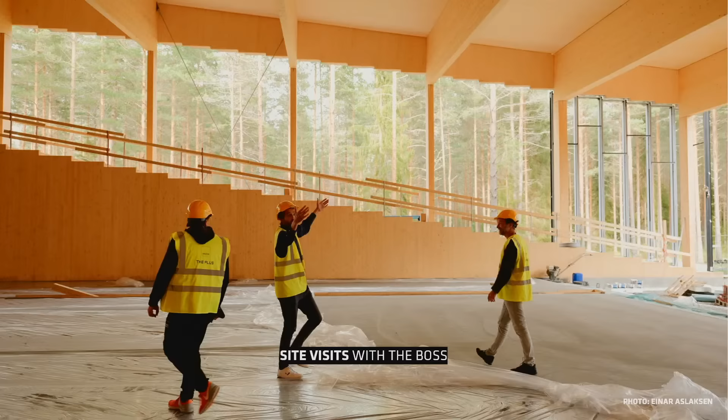And here we went on site visits. This was like half finished. Went with the boss. And here you see my boss, who's not really convinced with what I did. But I still have a job, so I guess it's okay. And this was the rendering from the beginning, and this is how it basically turned out to be. Now it's also green in summer. Now it's full of snow. And that's it.

One of the best factories I've ever seen in my life, hands down. Brilliant work. I think it redefined the way of working workplaces. Fantastic. Thank you so much for this nice presentation. I'm glad to see that you used so many sustainable materials, local material, Circal. Brilliant. Well done.

And now to the women question, right? As an architect, moving around places and taking on this project, what would be your piece of advice for young women architects who are venturing into a career like this? Move to Scandinavia. They always live it ahead, you know.

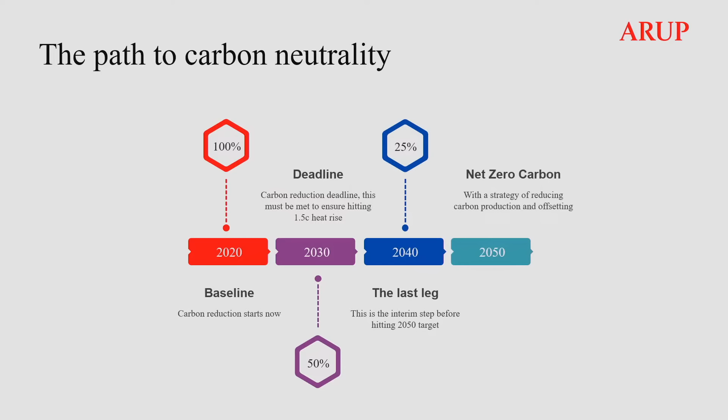In order to achieve carbon neutrality by 2050, we need to set ourselves some intermediate targets. Climate researchers introduced the so-called carbon law in 2017, which defines that we need to halve carbon emissions every decade to ensure that we reach our goals. This is acknowledged as setting realistic intermediate goals so that we can combine short-term measures and long-term goals.

In alignment with this, the European Union defines the Fit for 55 legislation, which requires a 55% reduction of carbon by 2030. And some countries define their own goals, such as the German climate law targeting 65% reduction by 2030.

Unfortunately, current data imply that we are not on track to achieving these goals, so we have to very much improve our effort to get where we want to be. It is a huge task, and we need to ensure that all industries work together, and we have to be very careful that we do not shift carbon emission from one trade to the other.

Of course, we have to move away from fossil fuels towards renewable sources. But we also need to make sure that we only use as much energy as needed, because the capacity for renewables is, of course, limited. And at the same time, we have to minimize the upfront energy consumption during construction, because this alone is responsible for up to 12% of the overall carbon emission.

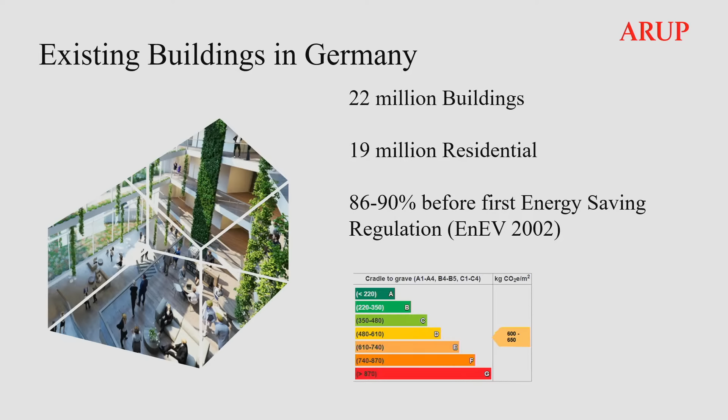If you look at Germany, we have currently 22 million buildings. 19 million of these are residential buildings. And up to 90% have been built before the first energy saving regulation in 2002, which clearly shows that these will need a lot of improvement if they want to contribute to the climate targets.

But refurbishment is not only about reducing the energy consumption and reducing carbon emission. We also have an opportunity to make buildings healthier, reduce hazardous materials, make buildings greener and improve the quality of the surroundings. We can also make buildings more accessible and therefore fit for an aging society. And we can introduce charging points for e-mobility so that they can help change the mobility strategy.

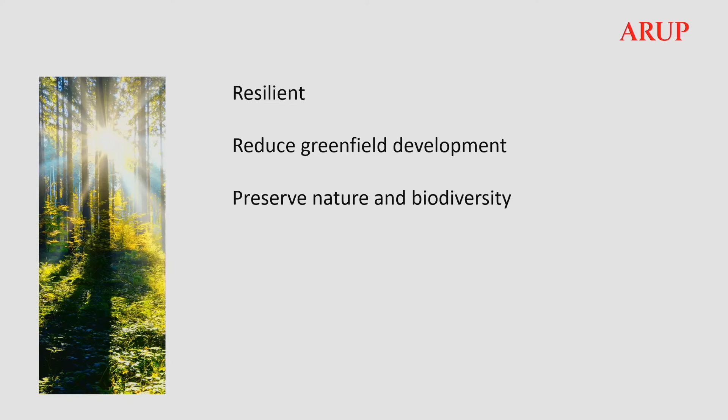On a wider picture, refurbishment allows buildings to be made more resilient against climate change. And perhaps most important, it can reduce the requirement for greenfield development. And therefore, we can help preserve nature and biodiversity and also agricultural areas.

But with such a large requirement for renovation, there are also some risks involved. The biggest risk, of course, is that we miss our chances, but we also need to make sure that we reuse the large stock of resources that's inherent in the existing buildings, and that we use new resources efficiently, which means that we have to implement life cycle thinking.

The first building I'm going to talk about is Haus Neumarkt, a building in Cologne. This is obviously a historic building picture. The building was built in the 1950s and has a special significance for the Cologne city center because most of the post-war buildings have been demolished, and the awareness of the heritage value has only developed in recent years, and therefore most of these buildings have been at least partly or completely listed.

After the renovation in the late 80s, the building had completely lost its original character, and the client polis initially considered demolishing it and building a new building. But he then decided to preserve the Haus Neumarkt and make it fit for the future as part of an energy revitalization strategy of their portfolio. Arup was commissioned with the design of the building envelope and building physics and acoustics consultancy.

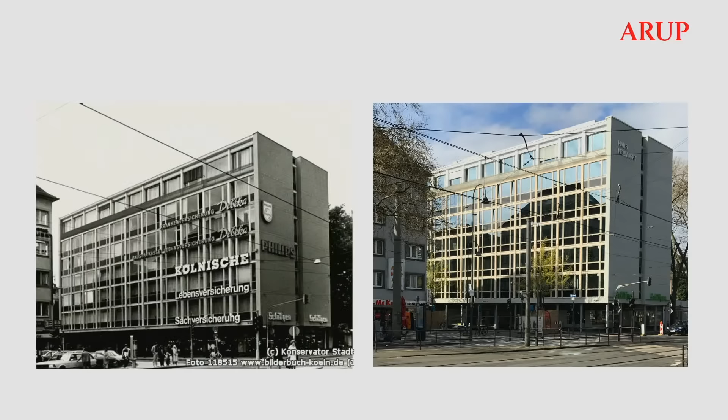The reconstruction was carried out in line with the historical preservation requirements and in close cooperation with the conservation department. Since the renovation in the 1980s left some irreparable damage to the facade, the external facade had to be completely demolished and reinstated.

The redesign was based on historical documentation, and it was important for us to reinstate the main characteristics of the post-war building, which were the typical three-part Cologne windows, as well as the characteristic black glazed spandrels, the slender sightlines, and the slender stone framing made of Jura stone. But of course, we also had to take into account modern building regulations and thermal and acoustic performance.

The design drivers for the development of the design were keeping the facade profiles as thin as possible, minimizing the facade weight because we had to make sure that the existing structure could still support the new facade, and reducing the energy demand, which means, of course, improving the thermal performance. One of the greatest weaknesses of post-war buildings, unfortunately, is the poor thermal performance. So this had to be enhanced.

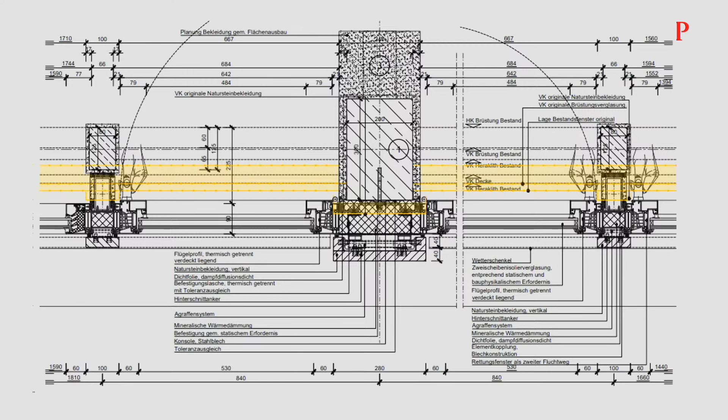Due to its location in the city center and near a busy traffic junction, we had to achieve quite high acoustic performance requirements. And therefore, our acoustics team carried out some very detailed measurements to ensure that we could optimize the glazing so that we could achieve a good acoustic performance for the users, but at the same time minimize the weight of the glass, which, as I said, was important for the supporting structure, but also from a sustainability standpoint. This is important because we want to avoid over-specifying and just use as much material as we have to.

A thorough material selection process has been established in close cooperation with the Heritage Department. And because we used a lot of valuable materials on the building, we made sure that they will be able to be reused after the end of the life of the building. So we avoided using composite materials, and we made sure that all materials could be easily disassembled. And we designed simple plug-in connections that allowed a simple reuse at later times.

As a large amount of the building substance could be maintained, we could save a lot of carbon emission. And just by reusing the reinforced concrete structure, it was possible to save about 1,300 cubic meters of concrete, which is equivalent to 2,500 tons of carbon.

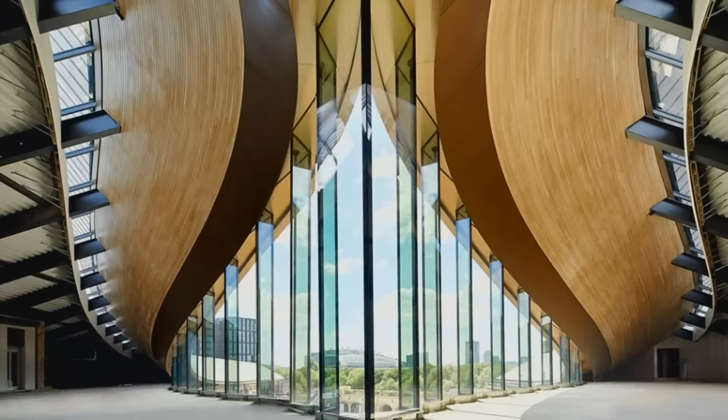The upper level is enclosed in a tapering 8-meter tall structural glass facade. It spans vertically between the slabs and trusses and relies purely on the glass and the geometry to support itself.

The adjacent 3 former gas holders are now accommodating high-end residential developments with 145 apartments. The architect was Wilkinson Eyre Architects, and Arup was appointed with facade engineering and wind engineering, and also structural engineering. The gas holders were originally built in the 1860s to provide storage capacity for the gas that was produced from the coal.

The residential buildings were built within the 3 interlocking former historic gas holder guide frames. The frames were dismantled, refurbished and reinstated, and complex wind calculations were carried out to ensure that they could support themselves and did not have to be restrained back to the buildings.

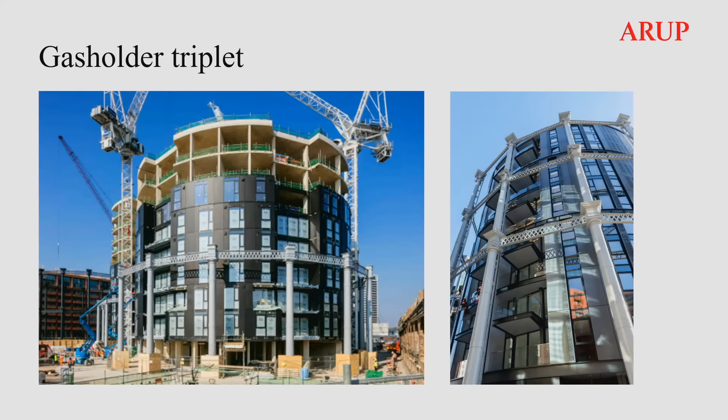A unitized facade was developed for the building to ensure high quality of workmanship and efficient insulation, and it also allowed the facade to be erected at the same time as the reinstated gas holder frame. The balconies were also assembled off-site and installed at the same time as the unitized facade. The sliding folding doors were hoisted in place afterwards.

The material and design was selected in order to reflect and maintain the industrial appearance of the building, whilst also achieving modern high-performance thermal and acoustic standards.

So in summary, maintaining and respecting the existing building created identity and developed a suspenseful contrast with the state-of-the-art modern facade on the top of it. Reusing what was left of the original building also allowed us to reduce a lot of carbon emission.

So the last building I'm going to talk about is the Burrell Collection in Glasgow. The building first opened in 1983, and this is one of Scotland's very few Category A listed post-war buildings. The deterioration of the facade meant that it required copious renovation and repairs, because it needed to be ensured that the artwork was safe and the building itself was fit for purpose.

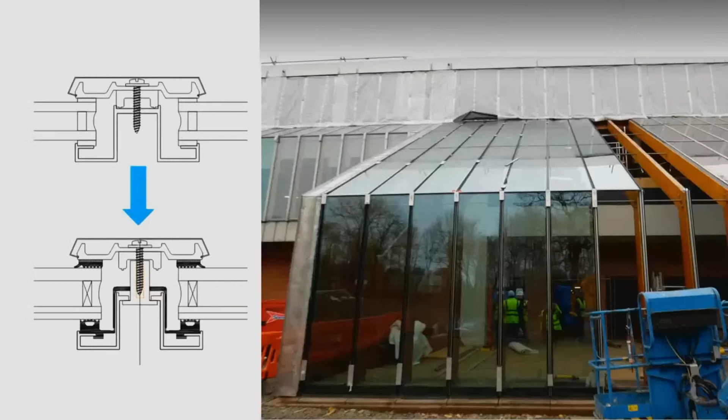We were also able to reuse the existing aluminium frames of the curtain walling, which saved 8.5 tons of aluminium. Detailed investigation and structural calculations were carried out in order to allow reusing the existing facade profiles. The profiles were cleaned, repaired, and the support was reinforced, and special gaskets were produced to ensure that the new facade can achieve up-to-date thermal and weather performance.

All in all, we could ensure that 16 tons of glass was reused for architectural glass, 8.5 tons of aluminium was saved, which meant that 80 tons of carbon emission was prevented. And no glass went into landfill. Body tinted and laminated glass, which could not be recycled in a closed cycle into architectural glass, was processed into other building products.

So in summary, the improvement of the building envelope contributed 51% to the overall improvement of the carbon emission and thermal performance of the building, which is equivalent to 626 tons of carbon per year. The main measures were the improvement of the roof thermal performance and introduction of PV panels. We also improved the air tightness of the facade and, of course, improved the solar performance and thermal performance of the glazing. But also, we managed to improve the quality of the exhibition space.